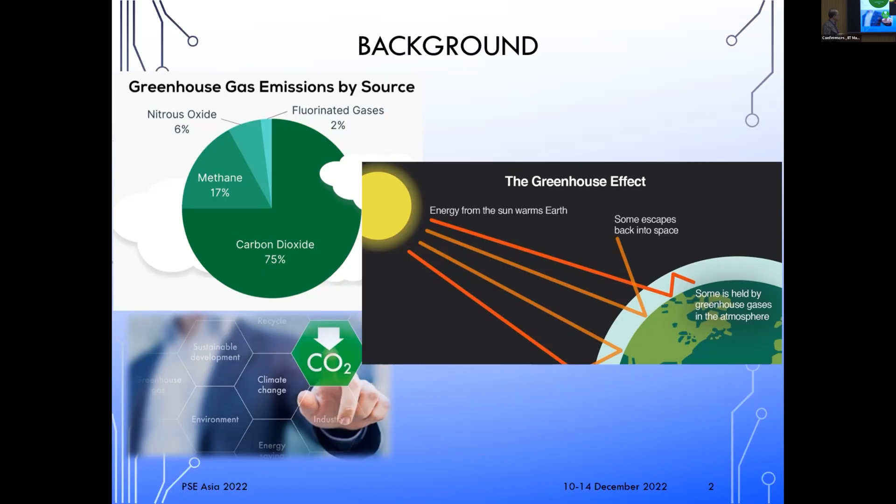The background is we know that the greenhouse gas emissions by source can increase the temperature of the atmosphere, and the sources can come from nitrous oxide, fluorinated gases, and carbon dioxide also here. And the greenhouse effect, we know that the energy from the sun warms the earth and some escapes back to space. And we are concerned with the CO2 emission.

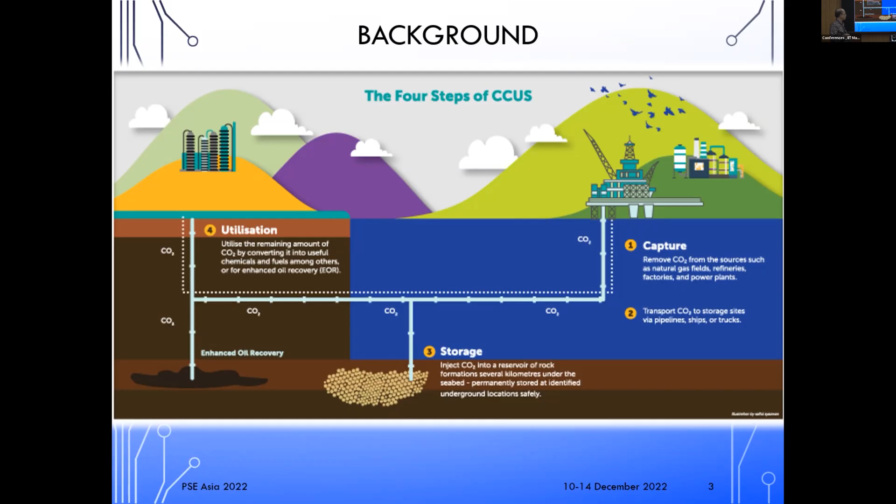The technology now to reduce the CO2 emissions is by capturing the CO2 either from the industrial plant or from the oil and gas well, where we know that we also have CO2 in gases. And the capture is to remove CO2 from the source and transport CO2 to some sink and then storage, inject CO2 into a reservoir of rock formation, and sometimes also it can be in the aquifer.

And one of the biggest plants in the United States, W.A. Parish, is the electric power plant, where they use the flue gas with CO2, okay? And then they capture the CO2, and 90% CO2-free processed flue gas. And we can also utilize the CO2 for enhanced oil recovery. And then some of the CO2 also comes out with the oil, and the CO2 can be returned to inject to the formation.

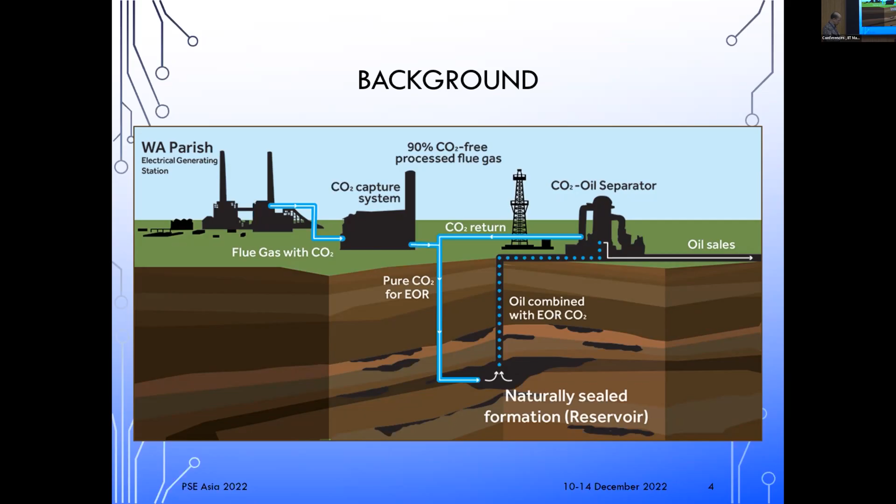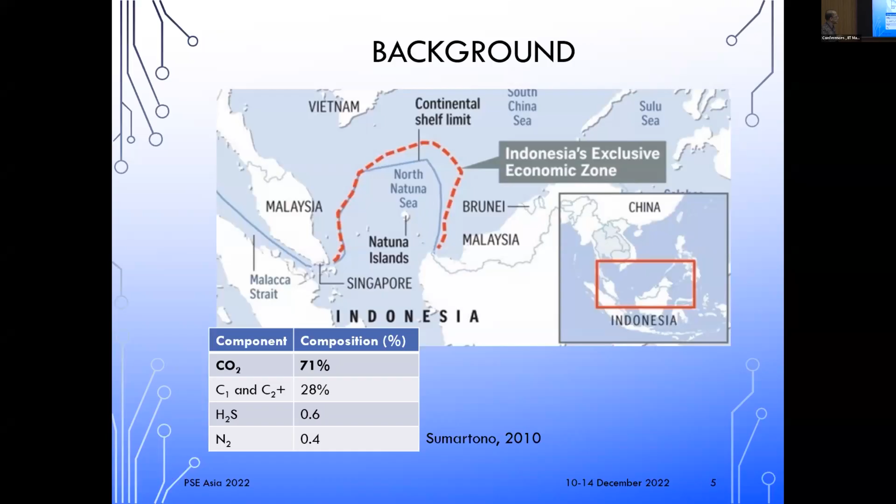And this is the gas well in Natuna Island, where the composition of the CO2 over there is about 71%, which is unusual because mostly in other areas in Indonesia, the CO2 is just around 30 or 35%. And we studied the separation of CO2 from hydrocarbon using cryogenics.

And for CO2 separation technologies, we can use processes like absorption, calcium looping, cryogenic, membrane, and biological with microalgae. And according to Palma 2021, cryogenic or low temperature separation has conventional and unconventional methods. In the conventional, for vapor liquid, we have cryogenic distillation. And for the unconventional, we can have cryogenic liquid, heat exchangers and packed bed.

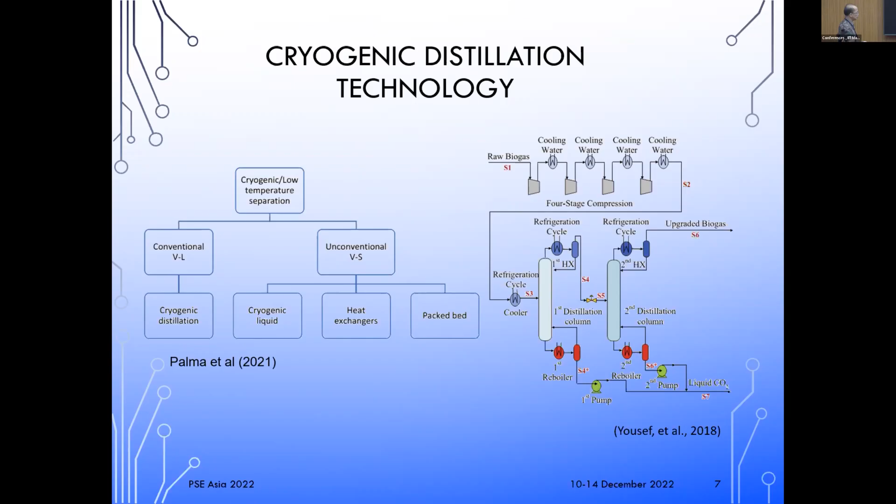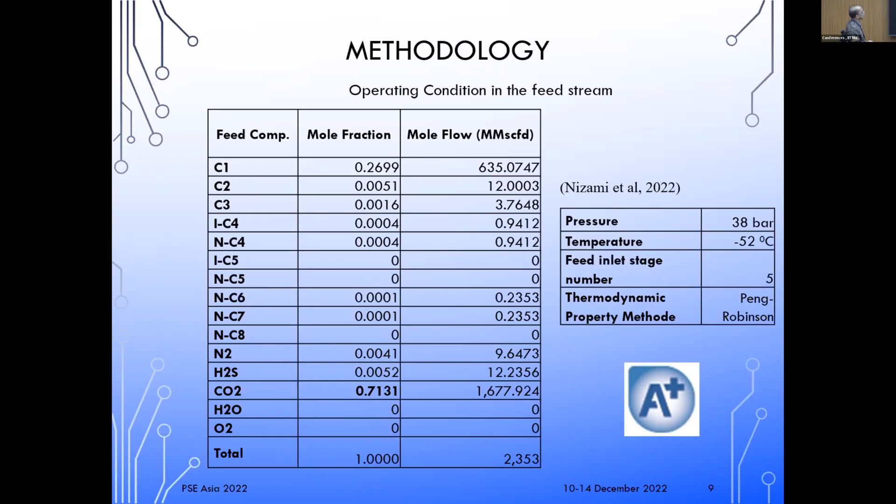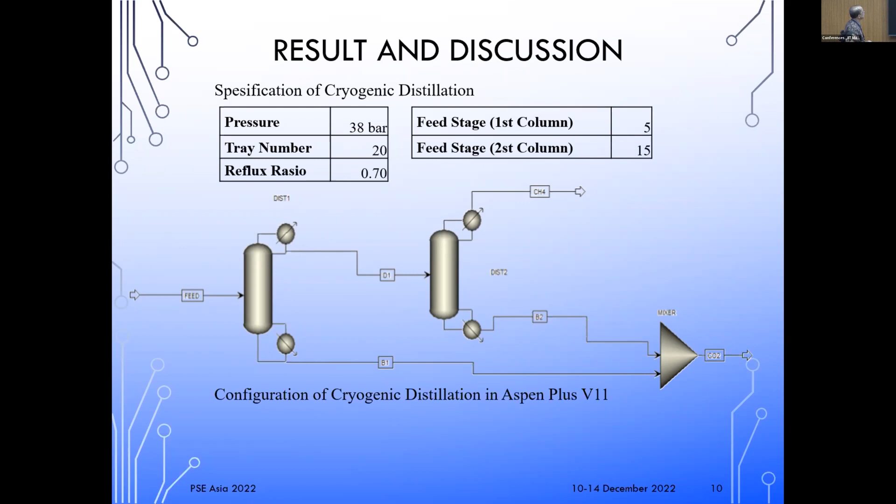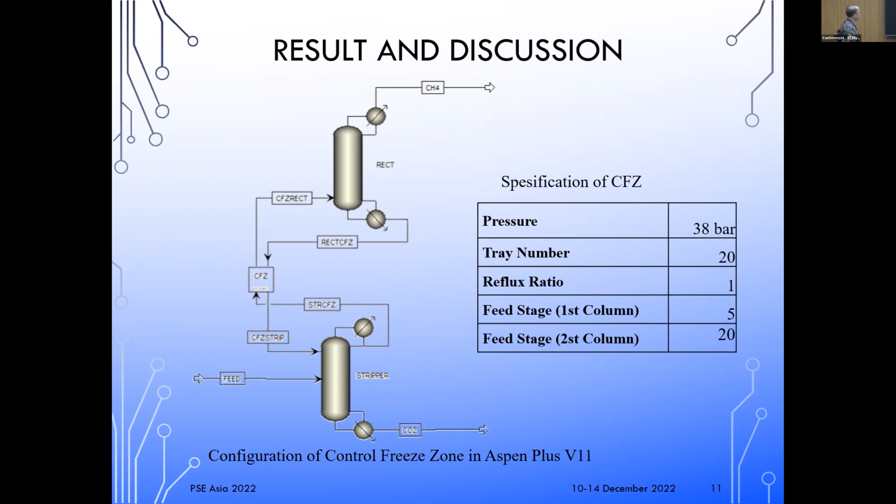And for the controlled freeze zone in Aspen Plus, since there is no palette for CFZ, we use a flash operation. And the result, we can see here that the purity using cryogenic distillation is 98.61%, and the CFZ about 98.75%. So it's almost the same about the purity.

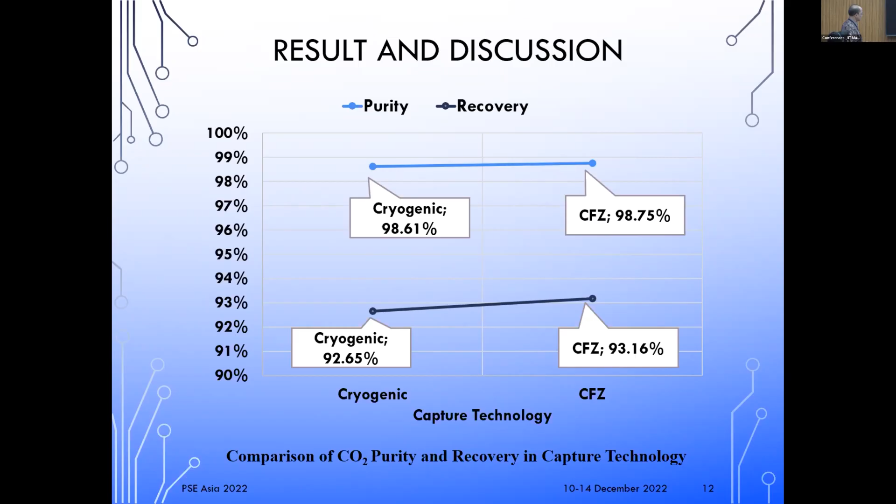However, from the recovery, we can see that cryogenic is only 92.65%, and the CFZ about 93.16%. We compare those two, then we can see that the recovery of the CFZ is much better than the cryogenic. And when we compare the duty for each capture technology, the CFZ has the heat duty of 0.8797 compared to the cryogenic of 0.6979. So the cryogenic distillation here has lower energy required compared to the CFZ.

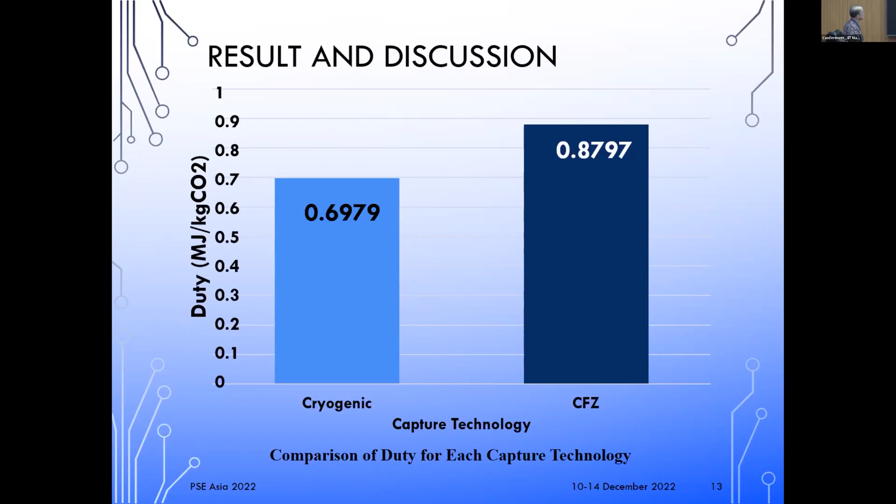And this is the result for having CO2 purity that can be used as beverage carbonation, food processing, etc., and fuel production for methanol, formic acid, for CO2 injection to conventional methanol synthesis, and EOR.

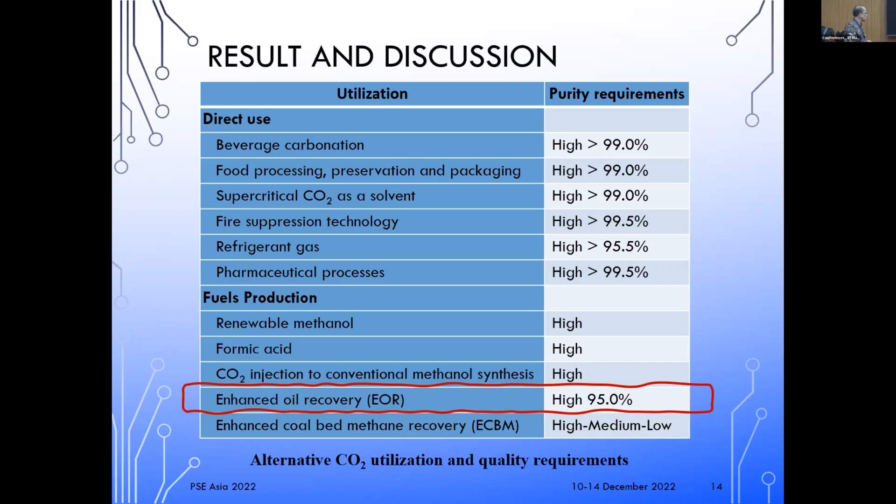Conclusion: based on the simulation result using Aspen Plus, the CFZ consumes energy 0.18 megajoules per kilogram CO2, or 21% higher than cryogenic distillation. Though the CFZ technology consumes higher energy, it has a purity 0.14% and a recovery 0.55% higher than cryogenic distillation. In other words, cryogenic distillation technology is able to obtain CO2 recovery and purity close to CFZ technologies, so that it can be used for EOR or other utilization with lower energy consumption.

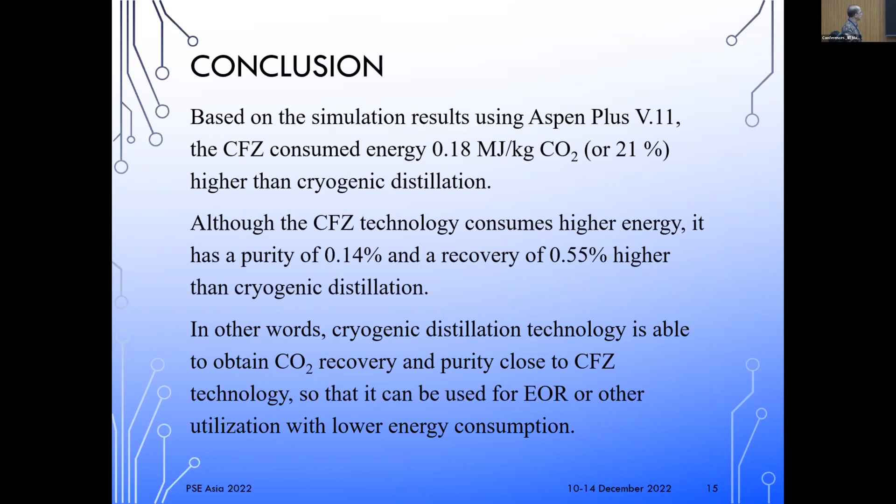I actually thought that using CFZ would be lower consumption. In fact, compared to cryogenic distillation, CFZ has higher energy consumption to get high purity of CO2 and high recovery of CO2. I think that's the end of my presentation. If you have some questions, I'd like to answer. Any questions for the speaker?

I have a remark. First, I would never use CO2 capture to do enhanced oil recovery, because at the end you are going to extract oil, and it means that you will not have a positive effect on the carbon dioxide balance, right? But then I have a question concerning the comparison between those systems and adsorption systems, or more conventional ways of capturing carbon dioxide, like MEA, for example. Do you have an idea of how it compares?

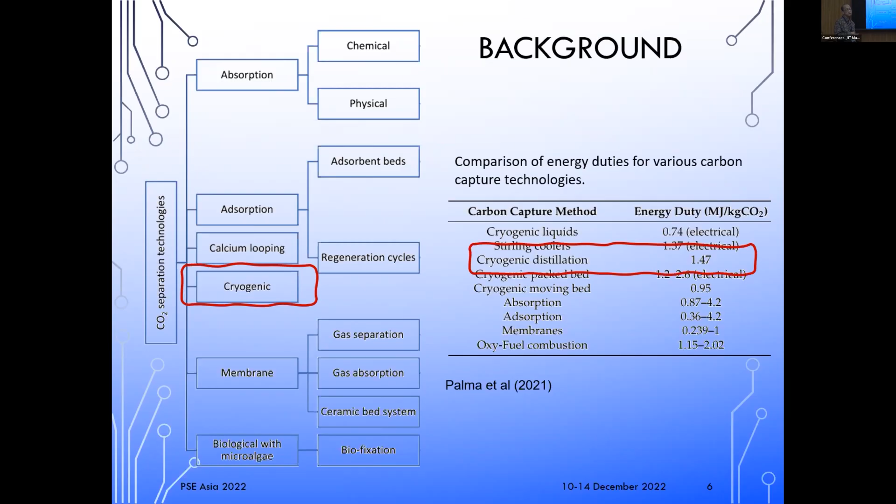Yeah, I don't have the comparison with the conventional, such as MEA or MDEA, or absorption. I believe that using cryogenic distillation or CFZ can also control the CO2 emission. Yeah, but here the energy that you consume is electricity, compared to others that are consuming heat. So which is different for the systemic integration of the system. But if you do not have the numbers, then... Sorry.

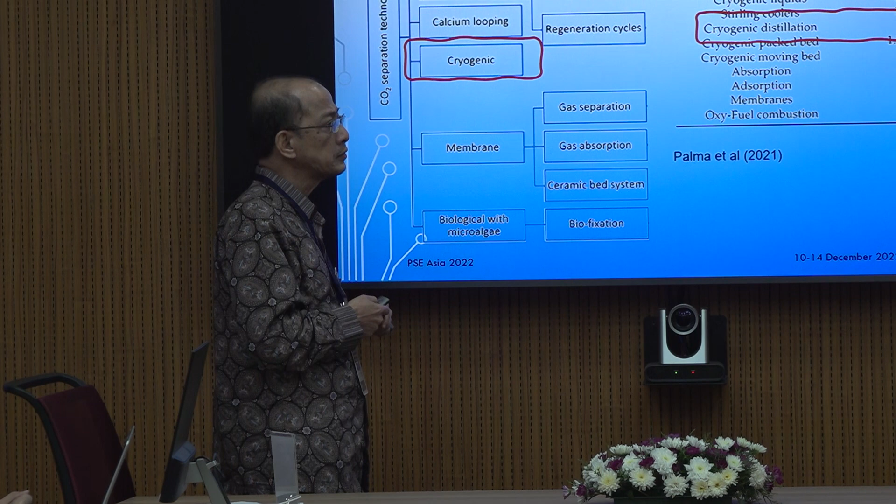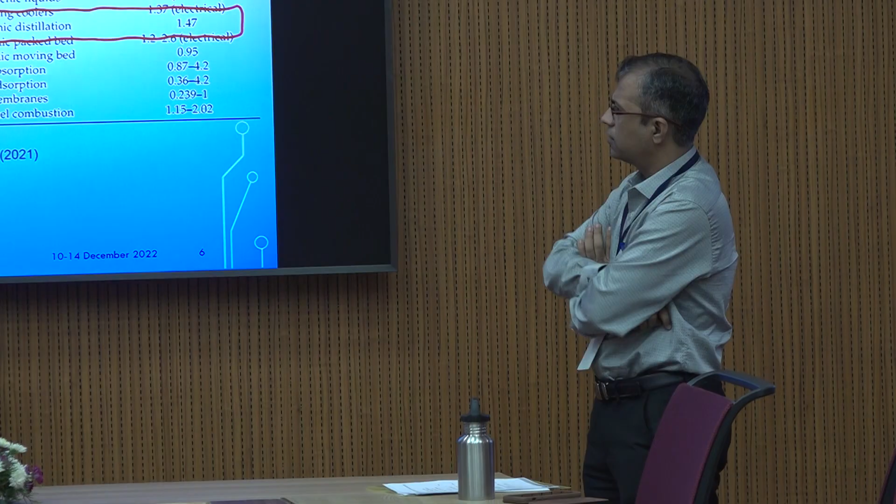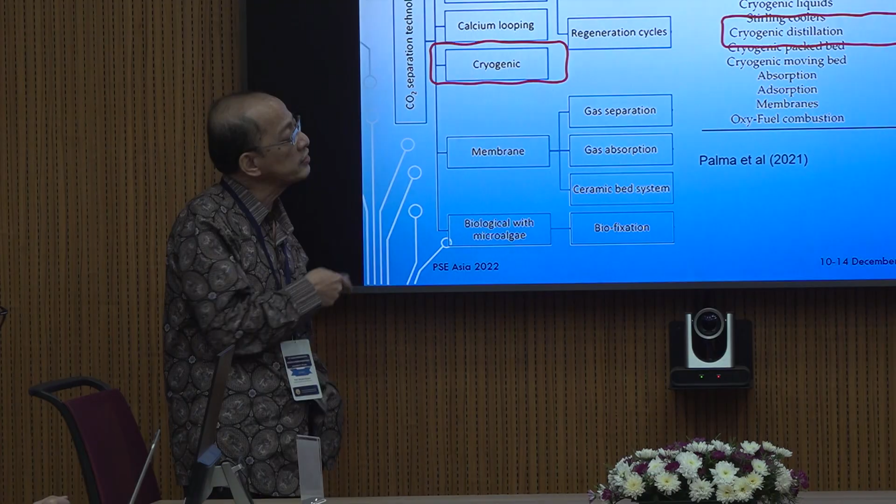Other questions? So I have one question. I may have missed it. What are the temperatures you're looking at? The temperature is about minus 50 degrees Celsius. Okay. And you showed one picture where you have a column where the middle zone is a freeze zone. So from an equipment design standpoint, how do you actually achieve these transitions? I don't know whether industry has implemented it or not. That's only recent work by some researchers.

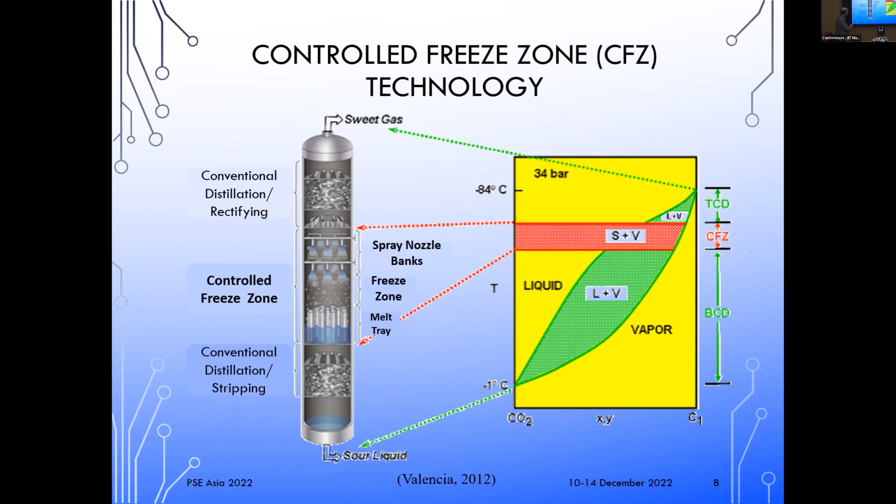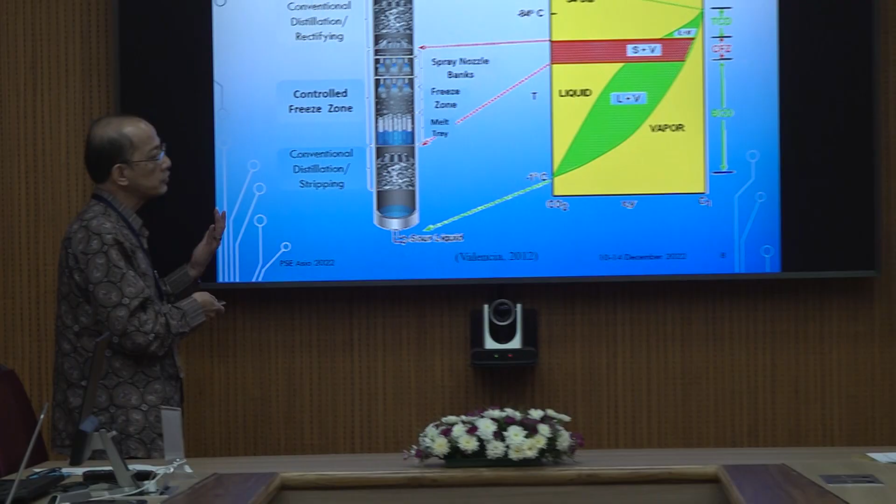Because typically you have a distillation column with one-way temperature change. Now you have a central zone which is a freeze zone, but on top and bottom you have higher temperatures. I'm just wondering how that is enabled in the column. I think it's something like this. You have the top of the column, of course this is going to be the lower temperature, and this is going to be the high temperature. And in this, we use a flash for simulation, just like in the conventional distillation column, where every stage is a flash operation.